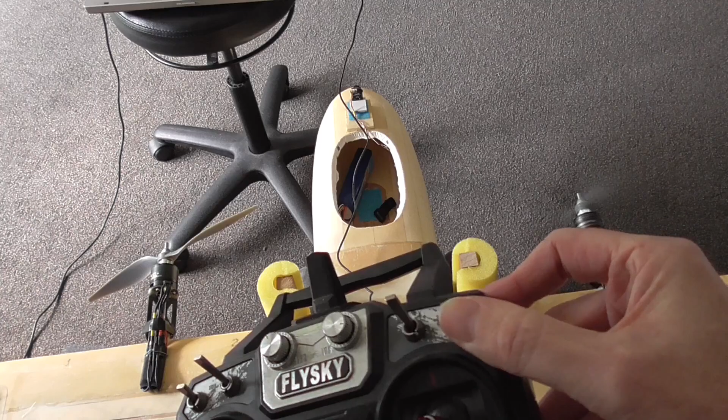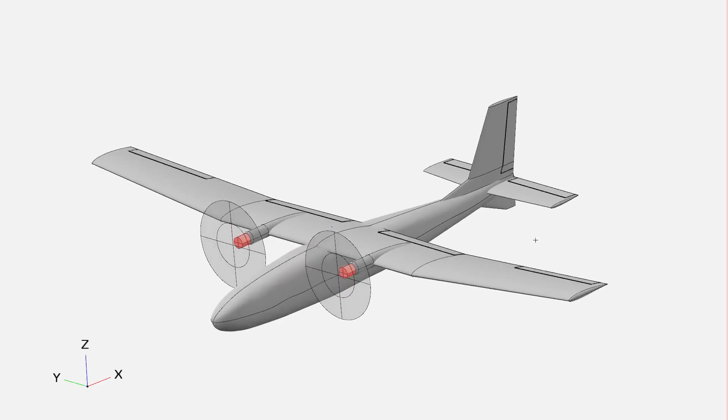Hello, one of the things I wanted to test with this twin hopper plane was what happens when one of the motors fails. I guess the first question would be, does it keep flying at all? But I wasn't really too worried about that. I was more interested in seeing what Ardupilot will do when that happens. Is it going to freak out and do something crazy, or is it just going to take it in its stride and not even care?

And it turns out it doesn't care. It just keeps operating pretty much as normal. It's kind of even hard to tell that anything's happened, possibly because this plane is so well designed.

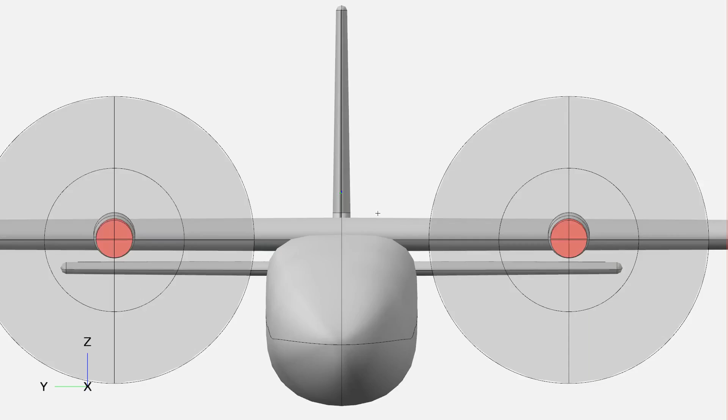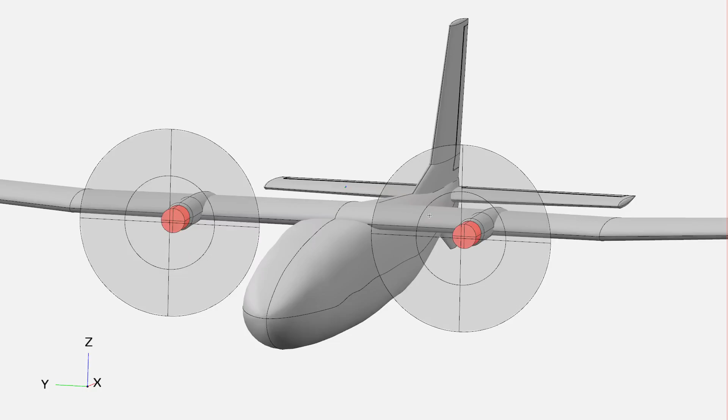If we look from the front, you'll see that I've placed the motors about as close to the middle of the plane as they could be. I guess that's what we would normally do, but I made sure I was doing that because I was thinking about doing this test even way back when I was designing this plane. So that's what we're going to look at in this video, and there's also one other thing related to missing motors and unbalanced thrust that we're going to test, so keep watching.

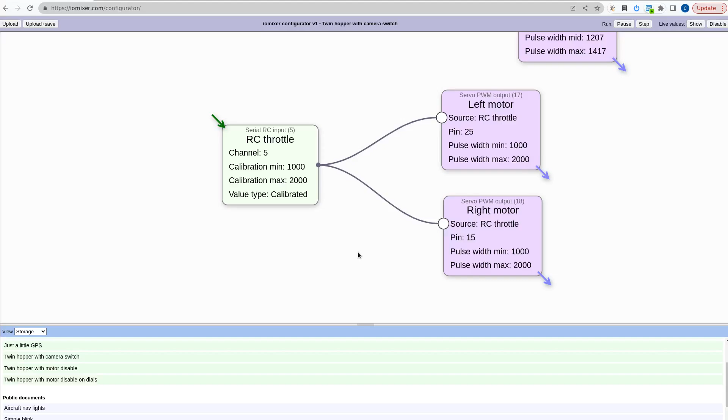So if you watched some of my earlier videos about this plane, you may know that I'm taking the S-bus output from the Ardupilot flight controller and bringing that into my iomixer to set the endpoints for the servos and do the slow movement for the flaps and a few other things. This is how I've been handling the throttle so far. There's nothing really special about it.

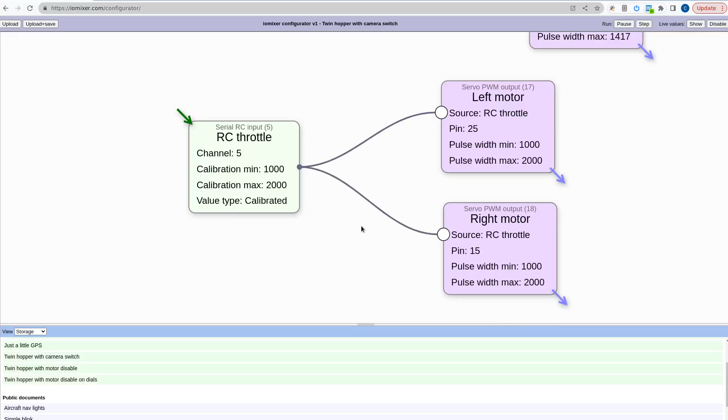This is the whole program that's running on the twin hopper, and this is just the bit where the throttle is being managed. There's no logic in between really, so this serial RC input brings in the S-bus signal, channel 5 in this case, and it just passes it directly to the left and right motors equally with no change.

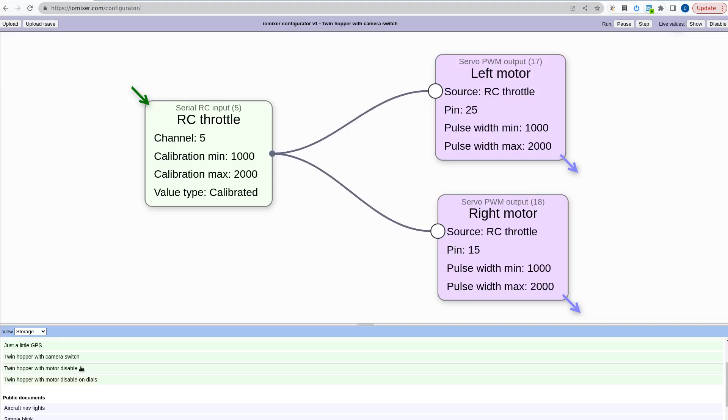And that little bit of video I showed you at the very beginning, switching off one of the motors, was done using another channel. So this is my throttle channel, and then we have the switch channel, channel 1, and we're just deciding whether we want to use the RC throttle as normal or use 0 for the left motor. So that's how that was working.

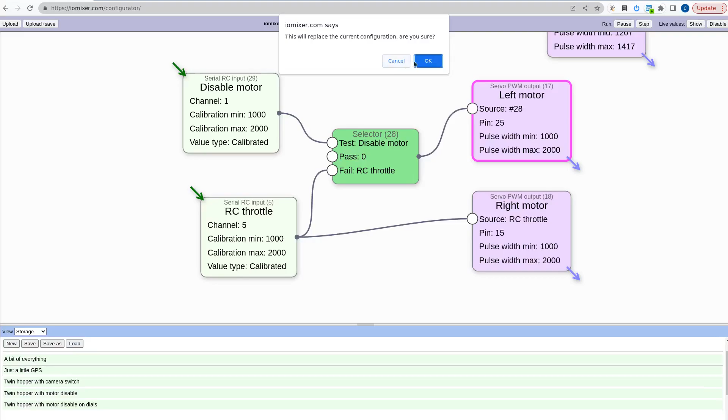Oh, by the way, I've made a little thing here. There's a new panel type called storage where you can save your programs online in the database, and then you can just fetch them like this. So that's how I'm switching between those programs.

One problem with this setup though is it's going to very abruptly cut the throttle when I flick that switch. One of those motors is going to go from potentially full throttle, depending on what the autopilot's doing, to 0, and it's going to try and brake that prop very, very quickly. It just seems a little bit harsh to do that, and I didn't really want to do that.

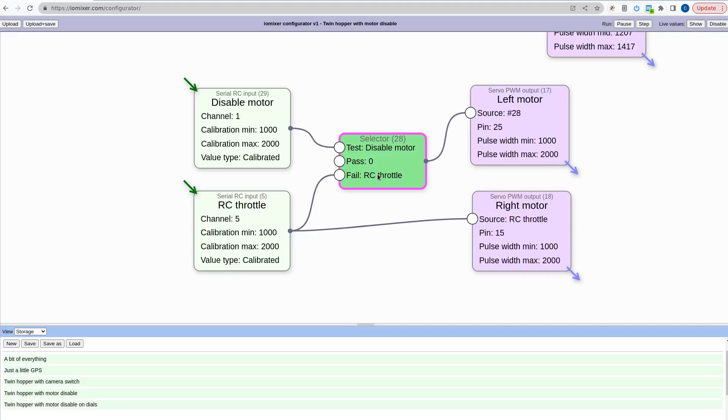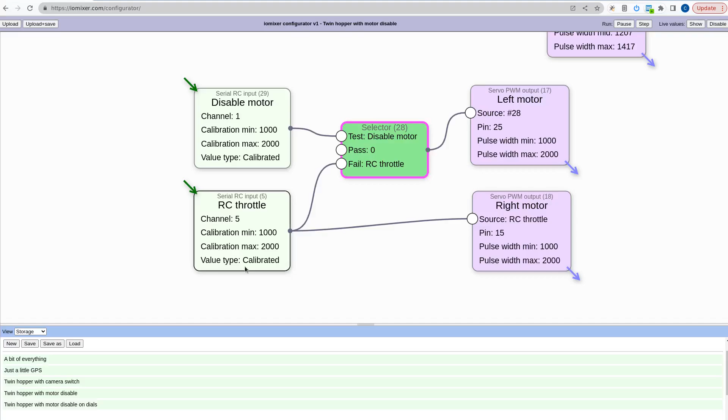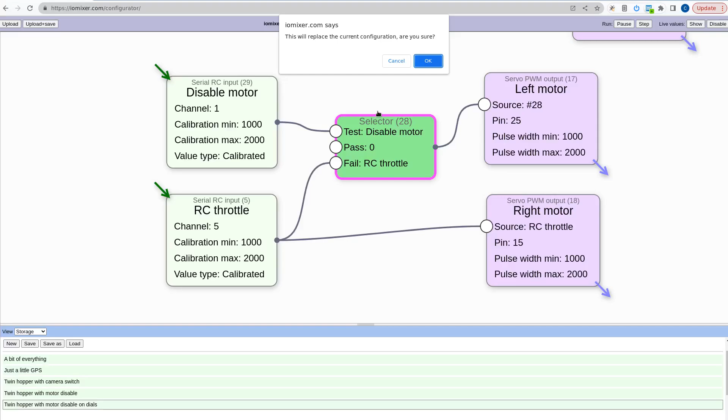But I was watching a video by Uncle Bruce the other day, and he was reviewing the Jumper something 20S radio, and he looked at the two dials in the middle and said, 'Oh, nobody uses those.' That reminded me, I have two dials on my FlySky radio that I could use to switch each of the motors off individually, and it wouldn't be so abrupt because the dial would naturally be a little bit more of a slower change. So that's what I did here, and we'll just ignore that bit there.

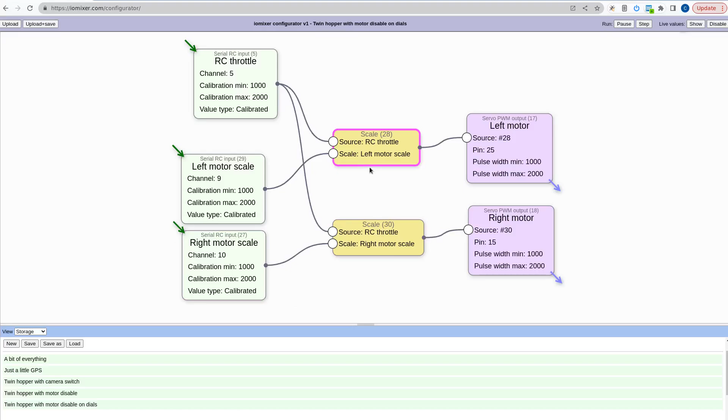So this is the throttle stick input, and it goes into both of these scale nodes, and then we have a dial. This is my left motor scale dial, and that's my right motor scale dial, and this scale just basically multiplies those two together. So when I turn one of the dials down, we turn that motor off, and when I turn the other dial, it will turn that motor off.

Oh, that didn't break. I wonder what happened. That's weird, it seemed to desync there.

Okay, just double checking my motors are on full power for the takeoff. No payload today, so this should lift off pretty easy. Whoa, right up there quickly.

Alright, so I'm going to turn the right motor off here, and that's with no stick inputs or anything, so just... So it's pulling to the right, definitely. Okay, I'll turn that motor back on.

Okay, let's see what happens in auto mode. So it still needs to climb, yeah.

Alright, I'll let it do one trip out there, so it's all up to altitude and everything's adjusted, and then as it comes back over where I'm standing.

Sorry, I'm going to have to interrupt you there, past Chris. After spending half the morning doing this, unfortunately there were no logs recorded by Ardupilot, so I had nothing to show for this, and I had to do it all again a few days later. But I'll show you this landing here while I'm talking, because that turned out kind of nice.

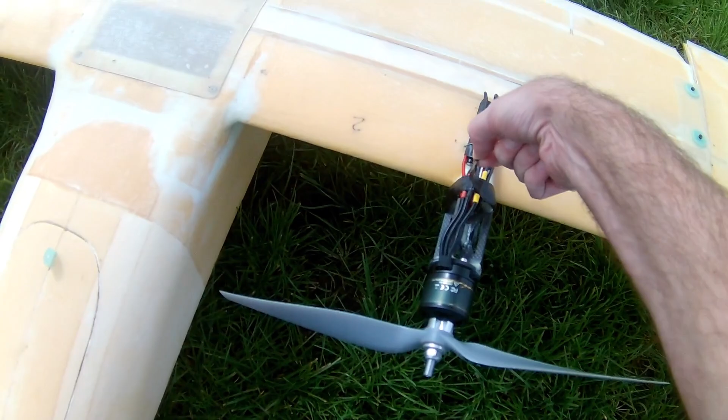All I need to do is undo this bolt, swap the props, and swap one of these connections under there. Actually, let me disconnect the battery before I fiddle around with my hands over there. So let me swap these over, and let's see if this battery can give us another launch. Okay, so swap those props over now - maybe you can see they're going to be propelling us when they go that way, like so.

To be honest, I'm not really expecting to tell much difference from the previous flight while I'm flying and looking through the FPV goggles or watching the plane. It's really only, I expect, going to be when we look at the log afterwards that we might see a little bit of difference.

Hopefully this will be a bit more of an empirical test than what Andrew did, because the trouble with what he was doing is, as a video demonstration, we can't really feel what's happening, so we're dependent on him describing what he's feeling. The problem is he's a pretty experienced pilot, so his fingers automatically do whatever needs to be done to correct the plane, which is okay, but then we can't really tell that very well.

So hopefully looking at the log will give us some actual measurements and numbers maybe. The other thing about what he was doing is it's a very small plane, and I kind of suspect that maybe at small scale it's not such an issue. The big thing is how much rotational inertia one motor carries relative to the rotational inertia of the whole plane.